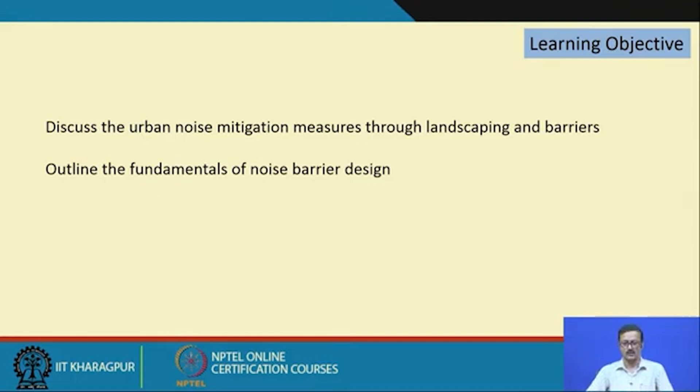Welcome to the NPTEL lecture on architectural acoustics. We are in the last week, week number 8, and this is lecture number 39, on urban noise control planning considerations, the second part of that lecture. In the first part, we discussed how the sound from the noise source can be mitigated. In this lecture, we will discuss urban noise mitigation measures through landscaping or barriers, and outline the fundamentals of noise barrier design. That is our learning objective for today's lecture, so let's go ahead with noise control.

There are three ways to control urban noise. The first is to mitigate from the source point of view, reducing noise from the source, which is probably the best way. The second is control of noise in between, in the sense of the path between the source and the receiver. This is another area where the architect or urban designer may play a vital role to reduce noise. We will discuss this topic today.

In noise control at the path between source and receiver, there are broadly three mitigation strategies. The first is geometric change, where we can alter dimensional properties of the road, setbacks, and vertical changes from the formation levels. These all come under geometrical changes between the source and receiver.

This is basically done in a newly developed area, in cases where a new road has been planned. For an area where there is already a road and a building constructed on the other side, this geometrical change may not be that effective.

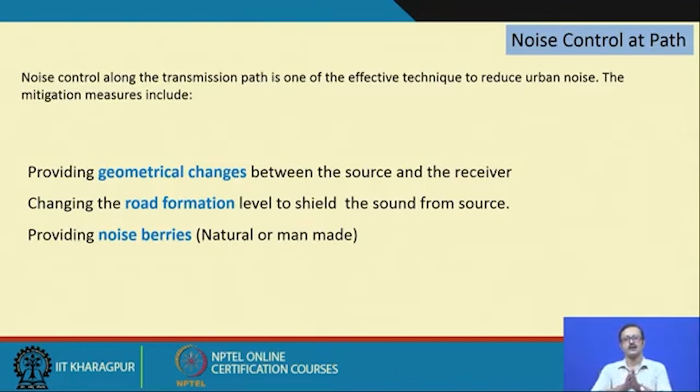In this regard, there are two effects we have to discuss. Imagine there is a source of sound and a receiver, perhaps a habitat area, while the source is a road with traffic noise. Between these two, two effects play a vital role. The first is called the ground effect, which is due to the various nature of the ground: the ground characteristics, source to receiver geometry, and the spatial character of the source.

Based on these factors, the ground will sometimes increase the level of sound, or sometimes reduce or attenuate it. So we have to look into the ground effect very carefully if we want to design based on ground properties. There are two types of ground as far as acoustics is concerned, which architects work with in the path between the source and receiver. This path may be a footpath, part of the road, a grassy area, pavement, or a building setback, so there are different characters possible.

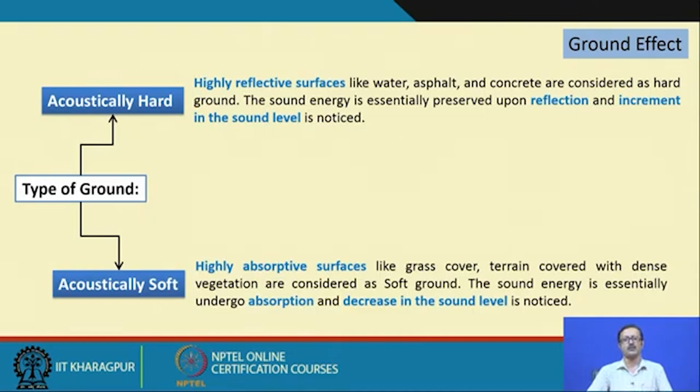By virtue of the absorption, most of the sound is absorbed, and very little proportion of the sound is reflected, so it acts as a good sound damper, a noise damper kind of thing.

The next effect, other than the ground effect, is called the atmospheric effect. The atmospheric effect also sometimes gives an increment in the sound pressure level, or sometimes it decreases the sound pressure level.

The prevailing condition of the wind, the prevailing condition of the atmosphere, the condition of the air, the presence of moisture in the air, and the presence of suspended particles in the air are going to give you this kind of absorptive criteria of the atmospheric effect.

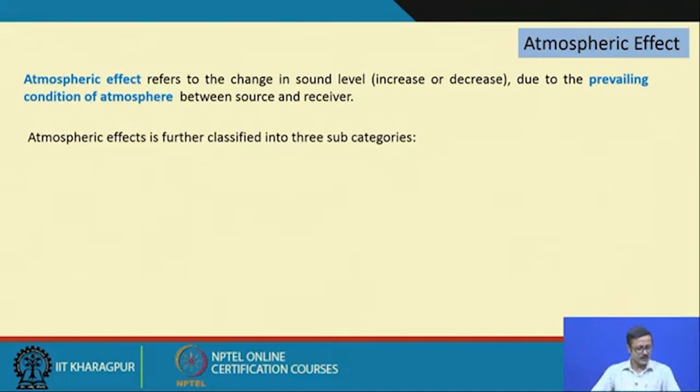It has three sub-classifications. The first is called atmospheric absorption, the second is atmospheric refraction, and the third is turbulence.

Atmospheric absorption is due to the nature of the air and the moisture present in it. The function of this particular amount of absorption actually depends upon the frequency of the sound.

It also depends upon the temperature of the wind or the air, and also the humidity in the wind or air itself, and it also depends upon the atmospheric pressure between the source and the receiver.

Out of these four, frequency is one of the prime important criteria. The temperature and humidity are also among the prime criteria.

As you may remember, in the second lecture we discussed how temperature plays a vital role in the velocity of sound. That gives you more propagation - more velocity means quicker propagation, or quicker shifting from source to receiver, and humidity also gives an absorption criteria.

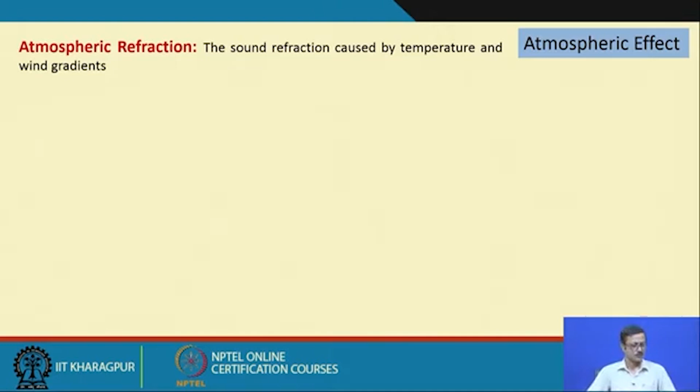Because of that gradient of the wind and also the temperature of the wind, this particular phenomenon of atmospheric refraction is going to change or vary.

So atmospheric refraction also gives you a kind of bending of the sound, and it gives some kind of temperature gradient. These things will depend upon the upwind condition and the condition away from the wind, and that kind of scenario will cause it to decrease or increase.

In the upwind scenario, it will decrease the level of the sound. If it is a downwind condition that is prevailing, then the sound level will increase at the receiving point.

The last one is air turbulence. Air turbulence sometimes occurs in the atmosphere, and this is a very unpredictable scenario. The changes in sound pressure level because of air turbulence are fluctuated, meaning it may not give a direct relation that due to the type of turbulence it will increase or decrease. It is unpredictable in nature.

So this refraction of atmospheric sound and the absorption of atmospheric sound plays a vital and important role in the mechanism of noise reduction from source to receiver. So these two effects, the ground effect and the effect of the atmosphere, are the prime parameters for mitigation.

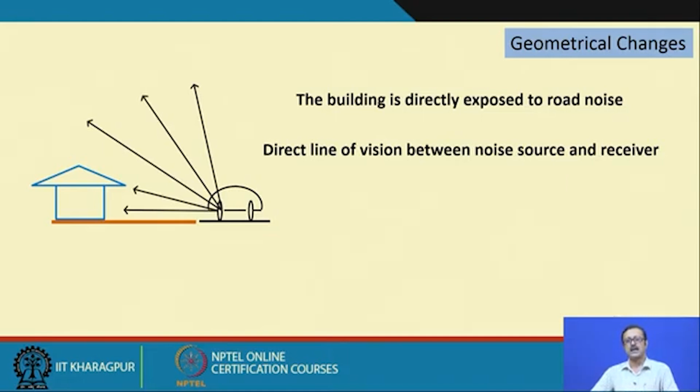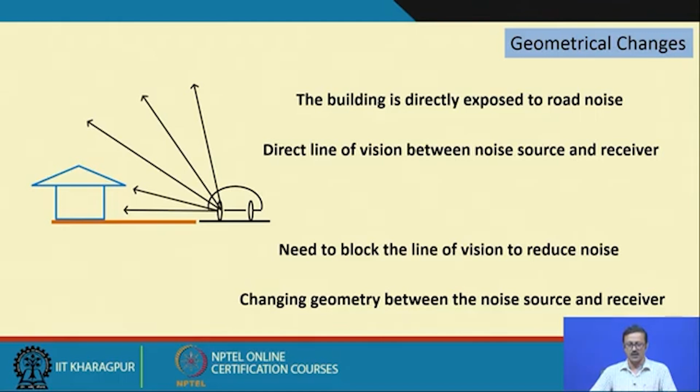So somehow we have to nullify this direct vision line, or the straight line between the source and receiver. You need to block this particular line of vision to reduce the noise, and this blocking can be done in various ways: formation change, barriers, geometric changes, and there may be a lot of other things. So what are the geometric changes?

The first geometric change can occur like this: the direct line of vision can still be there, but we can increase the distance between the noise source and the receiver. So we push the building a little back, as far as possible, and this is probably the first thing that comes to mind - that if we provide a higher setback from the source to the receiver, road to building, the noise will be reduced.

Definitely it is so, but it is not because of cutting this direct vision line - it is because, as we know, sound level is inversely proportional to the square of distance, and it is reduced by 3 dB by doubling the distance. So normally we can use this fundamental of sound physics and go for a larger setback.

But students, this particular criteria or solution is sometimes not feasible, because we may not get that much setback in the front setback - or sometimes we may get it. It depends upon your site, the dimension of the site, what will be the total FAR, what will be the total ground coverage, and what is the demand from the client. There are a lot of other things - you may not get that much distance.

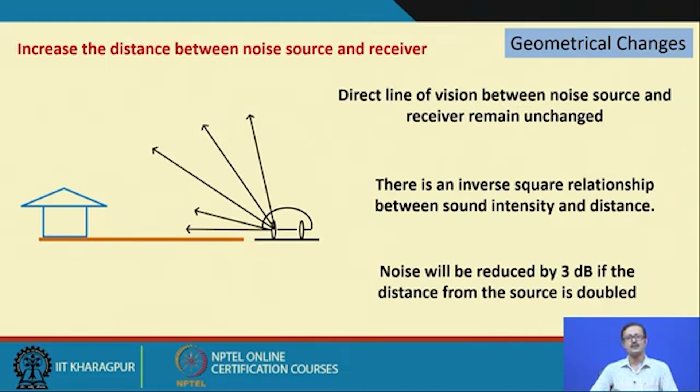Number two, it is only reduced by 3 dB. Let us assume the noise is almost 65 dB on the road. If you want to reduce it by around 10 dB, you have to go a huge distance from source to receiver. So sometimes it is not feasible, and it will only act as an academic kind of solution.

So the next one, maybe a better or feasible solution, is to change the level between the noise source and the receiver. We can make the building a little higher, or maybe we can sink the road a little lower.

Sinking or depressing the road level a little may not be feasible sometimes, because it is not in your hand if the road is already laid. But if you are going to have a road layout for a new area, working in a terrain or hilly site, then you can think of this kind of entry with a differential level.

Due to this change in the level of the road, the direct line will now become faint. The lower part of the source, very near to the source, gets blocked, though it remains exposed to the upper portion, and the building will be under some kind of noise shadow.

The efficiency of this reduction, how much it reduces the sound, depends upon two things: the differential level between the source and receiver, and the distance between the source and receiver. So that is the second solution.

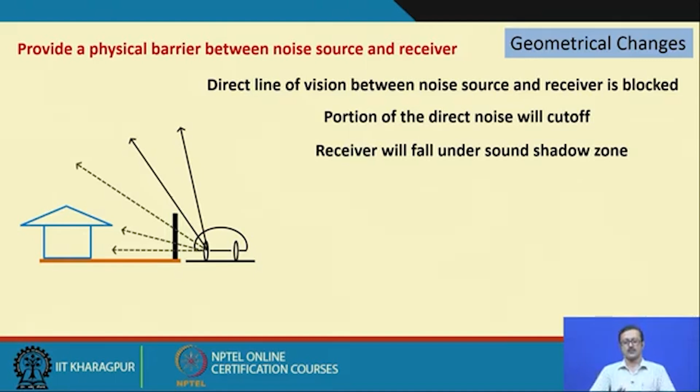This also depends upon the receiver-to-source distance, and the height and type of the barrier. So these all come under this particular category of geometric changes.

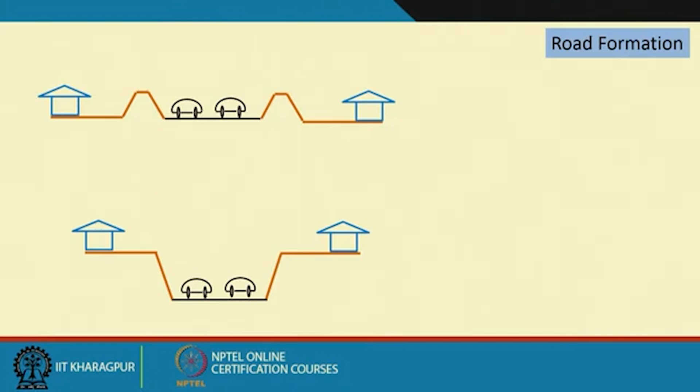Next let us discuss road formation. Road formation is another sub-category of geometric changes, because again I am going to change the levels and heights, and then try to put my buildings and habitats under a sound shadow zone.

But another disadvantage of this method of reduction is that it is not possible for an area where a road is already laid, or where a building is already under construction or constructed, and you think of doing some changes - that may not be possible.

But if it is a newly developed area, or within a particular site you are doing some kind of level changes for vehicular entries or service entry for lorries and trucks, then it is in the scope of your work, and you can also go for this kind of road formation change.

I have drawn a small sketch here, two sketches giving you a kind of road formation. In the first sketch, the upper one, there is no change in level. So suddenly I thought these two buildings have to be shielded or attenuated from the noise, so I can create some kind of earth mound or earth berm, and that is going to give you shielding.

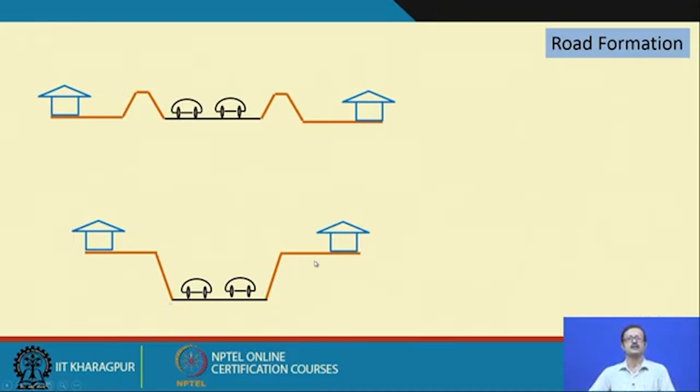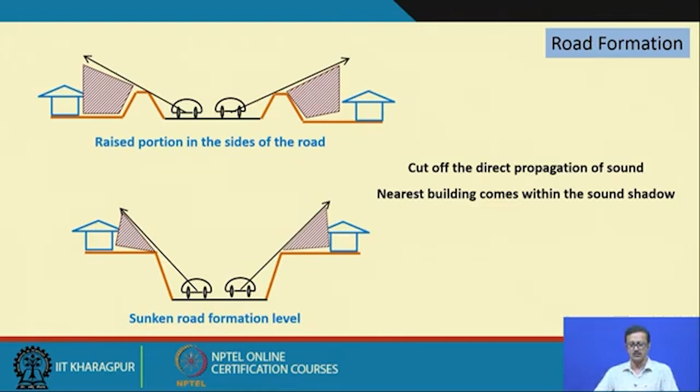Sometimes we can sink the road level down with respect to the sites where there are building plots, and definitely it can create a shadow to the building in the habitat area.

There are another three sketches. In the first top one, the noise shadow has been created through a kind of berm depressed section. Some areas with terrain development, or where the design requires a kind of sunken habitat to be developed, can use this approach.

There we can also integrate that with the noise reduction criteria. These trees are also going to be very important. I already told about this particular area where there is a grassy field or grassy cover, which is actually going to attenuate because of the ground coverage.

Here also it is the retaining wall sections in this figure. A retaining wall section can be thought of, and then this level of the room or the level of the habitat area can be lifted above and create a kind of sound shadow.

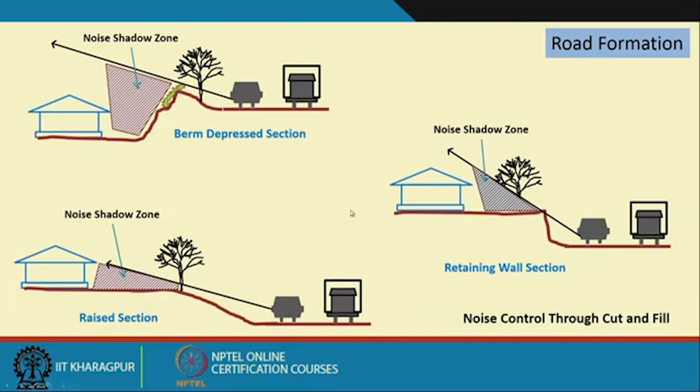Raised sections are also possible, and by virtue of the distance, the raised sections can also create a sound shadow. The next and last one is the noise barrier.

The noise barrier, as I told you, is a kind of barrier, a community boundary wall kind of thing, and it may be man-made or it may be some kind of vegetation, a group of vegetation or trees. So that can also be thought of for this noise barrier. It is a wall, particularly it is a wall.

It may be a soft wall or a very hard wall, by virtue of its density and the way it has been constructed, and what material has been taken for that construction. So this wall, suppose this is a source, this red colored dot is the source of the noise.

So there are a lot of phenomena that will occur. The first is the reflection, which can occur if it is very hard; if it is soft, it may not be reflected much. Then there is absorption, where the sound will be absorbed, and some sound may be transmitted also to the other part of the wall.

And one of the interesting criteria is that the sound which moves at the top of this wall can be diffracted, and this diffraction depends upon the atmospheric conditions and some other properties. So let us talk about this diffraction, because that is the important criteria to design the noise barrier or wall.

So I have put a road, and there are two sides of the road - one side is probably the noise source and the other side is my building, or whatever, the noise sensitive zone. So there is a sound source, marked as S, and there is a receiver, R.

Receiver - what is a receiver? A receiver point may be a window, a receiver point may be a kind of balcony, or a receiver point may be a kind of open area where people are sitting for a cup of tea or relaxing for some part of the day. So those are the areas or points that can be considered as the receiver of the particular sensitive zone.

So the sound will diffract, and this diffraction is basically governed by the density of the air layer, the temperature, the humidity, and the gradient of the winds also.

But this diffraction will not vary the equal amount for all frequencies. For the higher frequency, this diffraction angle will be very less. So it will diffract very little, just a slight diffraction will occur, and it will almost fly through.

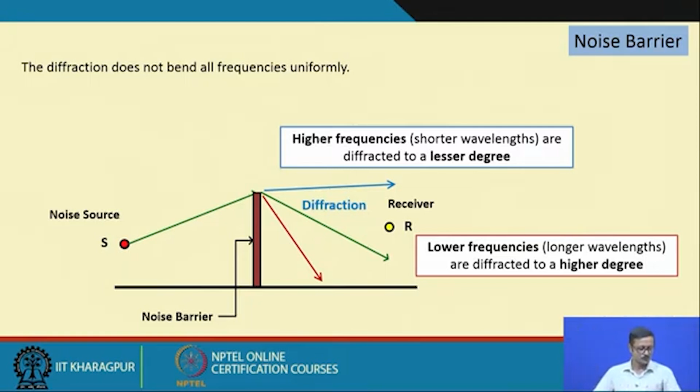Those will fly away from the top. So, from that I can understand that this is the first one which is flying away from the top of this noise barrier, which is a high frequency, and this is the low frequency which is tending back towards the ground. This divides the whole area on the side of the receiver into 3 zones.

The first zone is called the bright zone, which is above that particular flying line or line of sight. Why is it the bright zone? Because all the frequencies, both high and low, are present here. So suppose if you design a very tall building, the upper part of the tall building will be under this bright zone, and those balconies on maybe the 4th, 5th or 6th floor level will be exposed to all the sound. There is no vision cut here, that is this bright zone.

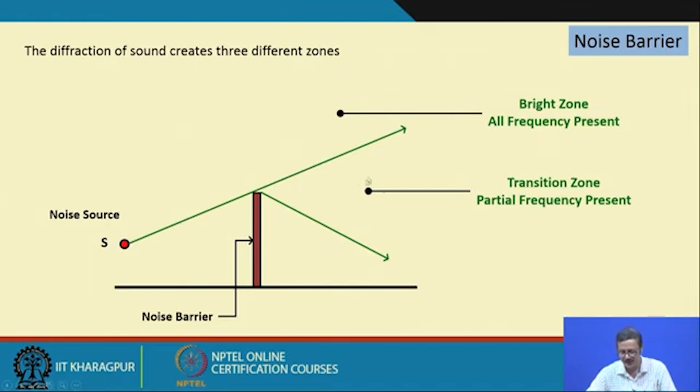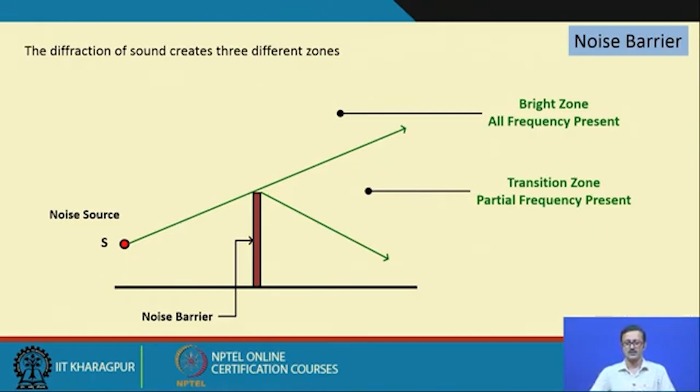Next is the transition zone, where only partial frequencies are present. It is a partial shadow kind of scenario, because the high frequency will tend to go straight and not diffract much, while as the frequency decreases it bends back more. So here, at the 2nd, 3rd or 4th floor level, some partial frequencies will be available, but some frequencies will definitely be eliminated from that zone.

Then probably the lowest frequency travels and is diffracted by a much higher amount. So I get a 3rd zone, the lower part of this triangulation, called the shadow zone, where almost no frequency is present. It is a truly reduced area, and this can be the ground floor area or any kind of outdoor area that falls under that particular shadow zone.

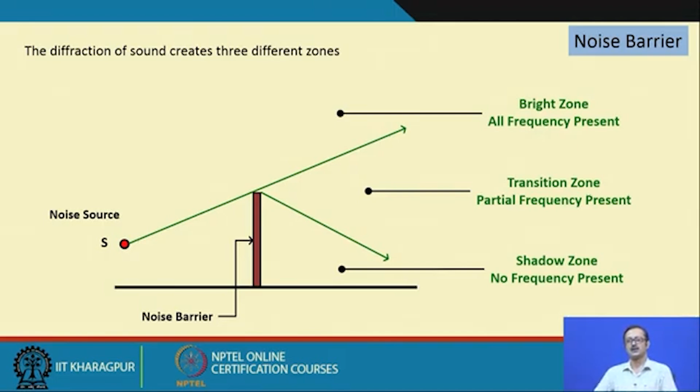So next you must think about how this design can be formulated. Going back to the fundamentals of the vision line and sound line going in the same direction, we can calculate the path difference. This path A plus B is the diffracted path because of diffraction, and suppose if there were no barrier, the path S to R, path C, would be the direct path. Of course the sound cannot move along this direct path because there is a barrier.

So what is the path difference? It is the diffracted path minus the direct path, that is A plus B minus C. This path difference, or delta, plays a very vital role.

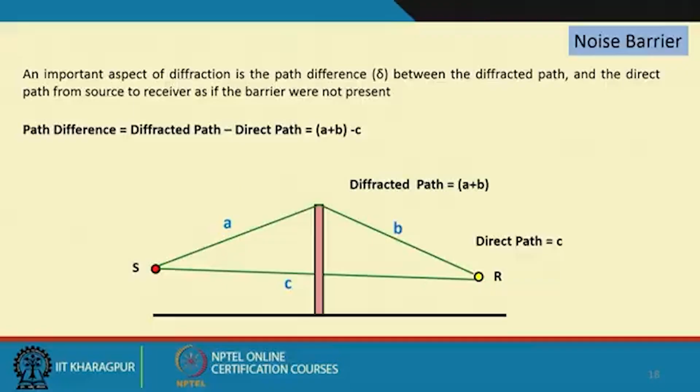Our role, being an architect or urban designer, is to increase this path difference by any means. As you increase the path difference, you get more area as a sound shadow area. You will be able to block more frequency and get the best benefit at the receiving end. So this path difference is one of the criteria.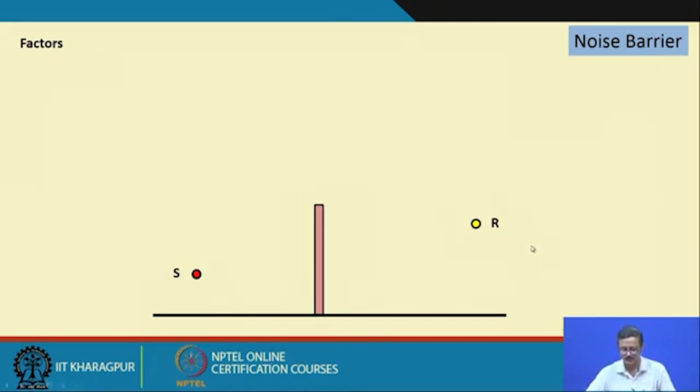Now, there are factors that reduce or increase this path difference. We will always try to increase the path difference to mitigate noise. Let us discuss these 5-6 factors. The source is the red color S and the receiver is on the right side, the R, in yellow color. The first factor is the distance between the source and the barrier. If you change this distance, moving the source away from the receiver or closer to it, and the barrier closer to the receiver too, there will be a change in the path. The next factor is definitely the distance between the receiver and the barrier. These mutual distances between source, receiver and barrier are very important to maximize the path difference.

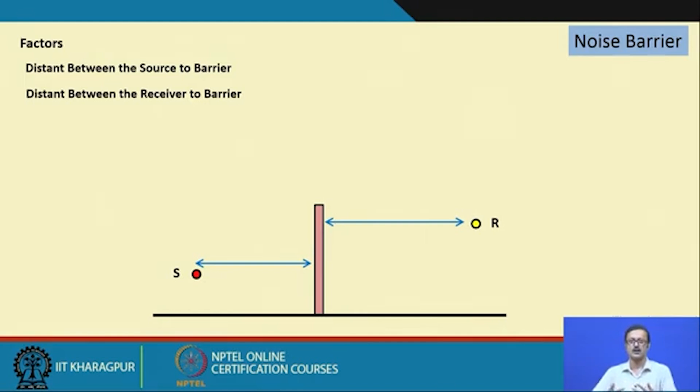The next factor is the height of the source from the road level. The next is the height of the receiver from the road level. These are 4 factors from the point of view of the source and receiver, and the last one is the height of the barrier.

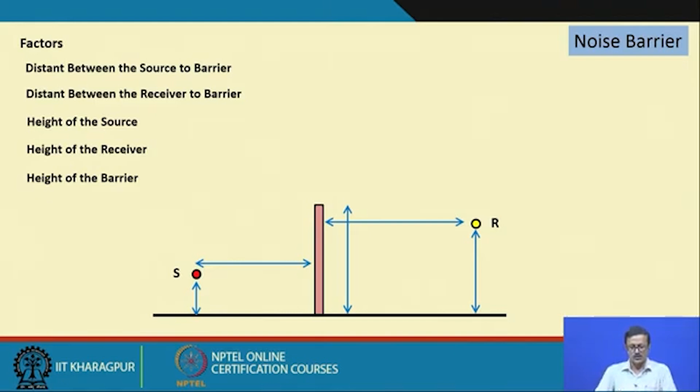That is also true, because if the height of the barrier is smaller, suppose all distances are the same, now the height of this is very small. So the direct path and the diffracted path will be the same, or maybe less. So you will not get any kind of benefit. So these are all geometric properties that play a role in this particular noise barrier.

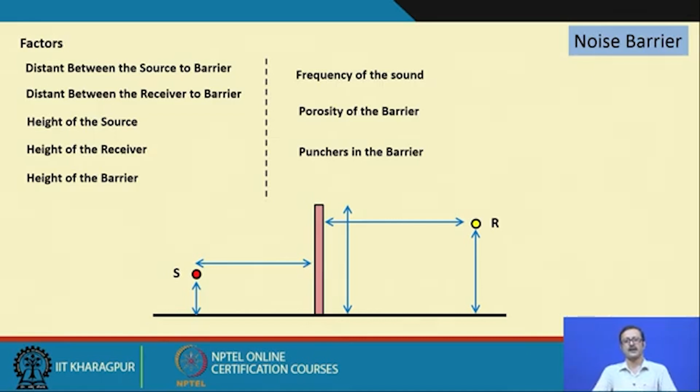There are some other factors also. I have already told you that frequency of the sound matters, because it diffracts the sound, and high frequency sounds may fly away or may not go in that direction. The porosity of the barrier matters too, whether it is a solid barrier, a green cover, or only a fence. That porosity is actually going to be important, and we know that if it is solid, it definitely gives you a lot of sound reflected back. A porous barrier will again allow some of this, and also punctures in the barrier, even if it is a solid wall, give you some kind of noise leak.

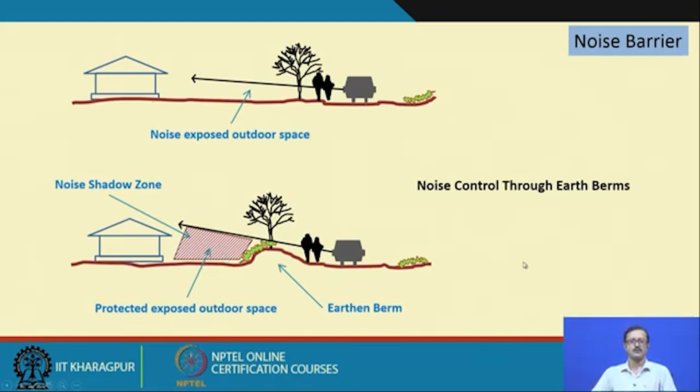There are some guidelines also. Maybe there are two types of arrangement for road light, street light, and trees placement. In one case, the trees may be placed on the side, and in another case trees may be in the central path, that is the road median, with street lights on the sides. So which one is good? Which one do you think is good? Definitely the first one, because that will give you some kind of barrier of sound due to the vegetation and landscaping screen.

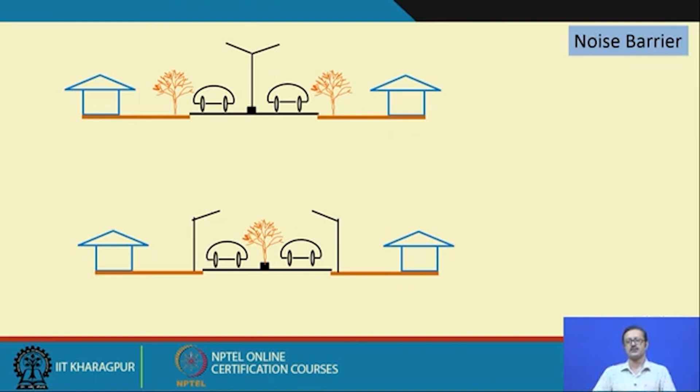Another point: if you want to provide rows of trees like a boundary wall between the road and the building, you must plant different types of trees. Do not plant the same type of tree, because the amount of sound absorbed by the foliage depends upon the texture of that foliage, and also on how many cavities are formed by the leaves. If you use the same type of tree, the texture and the cavities formed will be the same, so only a particular band of frequency will be absorbed. If you change the type of tree, maybe in two layers or zigzag, the different foliage and cavity formations will allow a wider band of frequency to be absorbed, because texture and cavities have a vital role in frequency absorption.

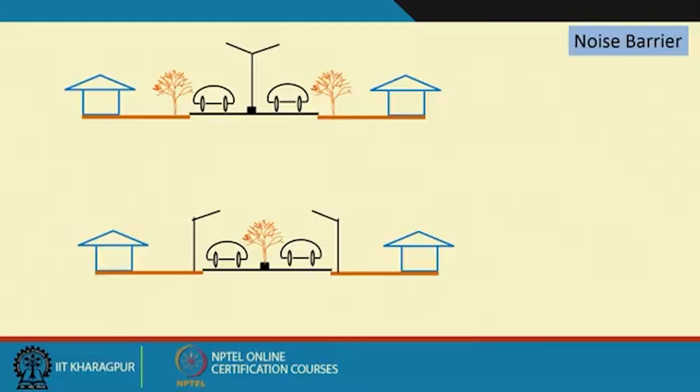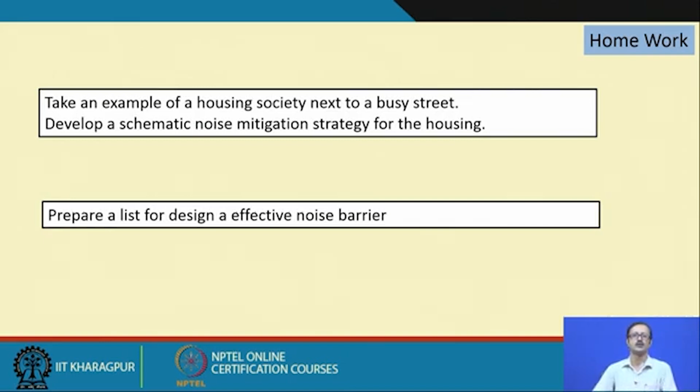So we are at the end of this lecture, and as usual I have some homework for you. Take the example of a housing society, one you stay in or one a friend stays in that you have visited many times and know about. Take a particular real life situation of a housing society, try to draw the plan of that society, and develop a schematic noise mitigation strategy for it, that is, what we can do to reduce noise from the road to that housing society. Second, prepare a list of things you would consider when designing an effective noise barrier. These are the two homework tasks, and that is all for this lecture number 39, on urban noise control, planning consideration, part two. The last lecture will be on architectural consideration. Thank you.